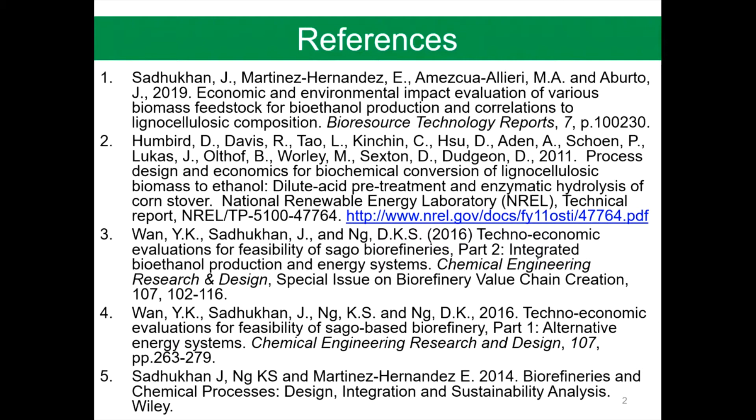And the final is a book written by me and my PhD graduates, Kok Siew and Elias, Biorefineries and Chemical Processes: Design, Integration and Sustainability Analysis. This is the most complete book on biorefinery and bioeconomy systems of present times.

The block flow diagram for bioethanol production. First, raw feedstock is taken to the A100 feed handling step. Feedstock is usually a lignocellulose material, therefore pre-treatment is needed to first break hemicelluloses apart so that celluloses can be extracted and lignin can be separated, because lignin hinders the fermentation process.

Hemicelluloses and celluloses are the polymers of C5 and C6 monomer sugars, and these need hydrolysis and fermentation to generate bioethanol from glucose. In the pretreatment stage, ammonia, steam, and acid are used. And as said, pretreatment is to extract the celluloses and hemicelluloses from lignin.

The hydrolysate, which is the soluble part, is taken to the enzymatic hydrolysis and fermentation process unit A300. An enzyme which acts as a catalyst to fermentation is produced from glucose and nutrients. Cellulase is the enzyme that is manufactured by a culture, and cellulase acts as catalyst for the enzymatic hydrolysis and fermentation process. Obviously, to maintain the bacterial culture, we need nutrients to the enzymatic hydrolysis and fermentation unit.

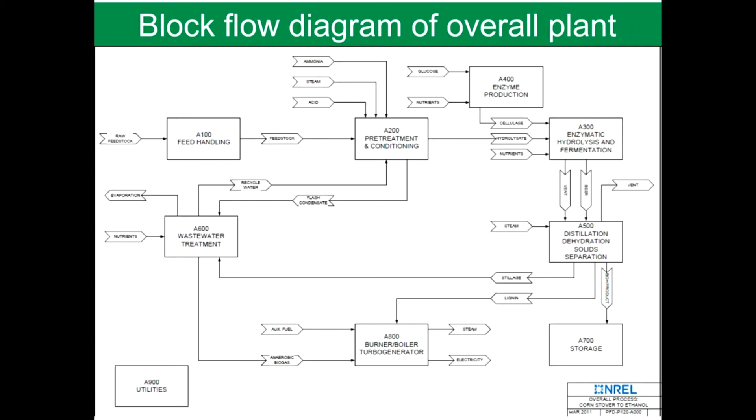The design basis in the National Renewable Energy Laboratory report is 2,000 metric dry tons biomass processed per day. And if a wet biomass contains, say, 25% moisture by mass, then the total wet biomass processing in tons per day is 2,000 times 100 divided by 75. That is equal to 2,667 tons per day of wet biomass.

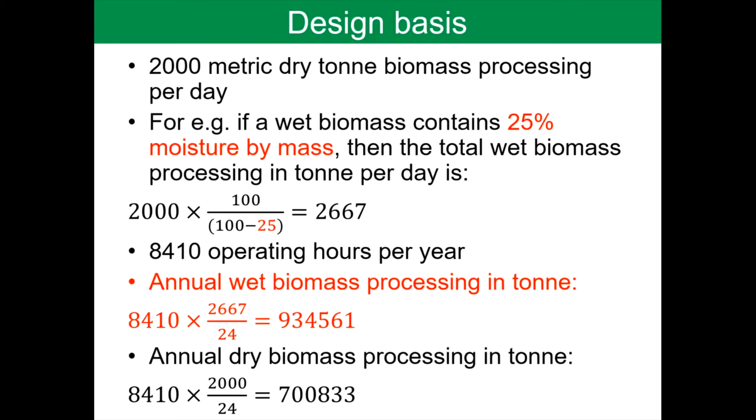Operating number of hours per year assumed are 8,410. Then from there, annual wet biomass processing or throughput in tons per annum can be calculated. And then annual dry biomass processing in tons can also be calculated. And these values are around 930,000 and 700,000 tons per annum, respectively.

Why do we need the calculations? It is to estimate, first of all, mass balance. Also looking at the energy analysis, energy balance, primarily bioethanol yield and combined heat and power yield. The process could be a net sink of combined heat and power. In that case, we really can't generate any additional heat and power. All will be used, and some additional steam may be used by the site. And in that case, there is no energy output, only bioethanol output.

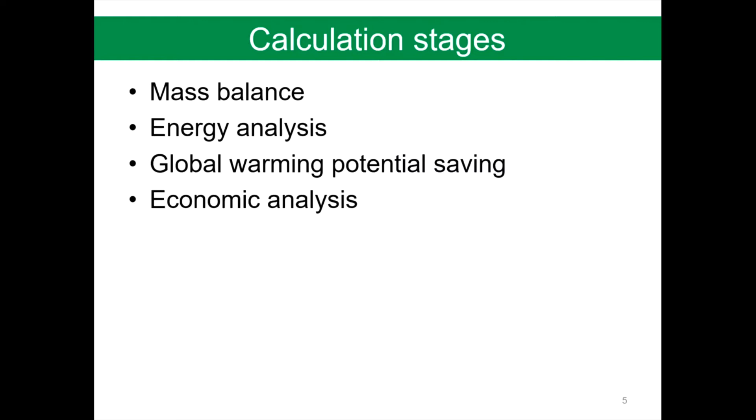But that really depends on the biomass constituents. And we are going to look into the biomass analysis, and from there try to estimate the compositions of the various products, including bioethanol as the main product. And then we're going to estimate global warming potential saving, and also carry out economic analysis of the plant to see the economic viability of the plant.

An example of biomass composition is here. The wet analysis in percentage of waste wood. Cellulose, 29.4% on a weight basis. The following chemicals, xylan, glucan, arabinan, mannan, galactan, comprise the hemicellulose fraction, and their percentage mass in the waste biomass is 20.4, 4.8, 0.5, 0.5, and 0.5 respectively on weight basis.

Lignin content is 18.7% of waste wood. Ash is 1.5% of waste wood by mass. And moisture by mass is 23.7% of waste wood.

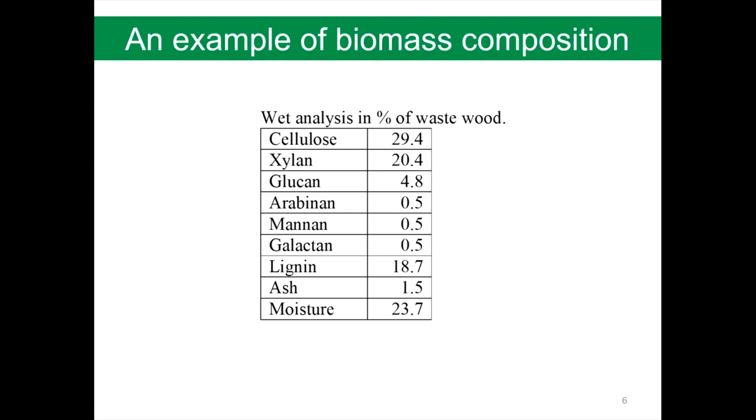Now the conversion rates, because we have to understand how much of the biomass constituents is actually converted into bioethanol. And this is to look at primarily the bioethanol product yield. In the rows, you are looking at the various types of products generated from the pre-treatment process. Basically, these will come as one hydrolysate stream, and within the hydrolysate, the various components will be present, which are xylose, furfural, oligomer, glucose, hydroxymethylfurfural, arabinose, mannose, galactose.

And these components are generated from the constituents in the hemicellulose. As we have seen in the previous lecture, the pre-treatment process actually attacks the hemicelluloses to generate the various water-soluble streams, so that the cellulose part and the lignin part are separated. And as you know, lignin hinders the microbial degradation.

Therefore, lignin has to be separated from the enzymatic hydrolysis and fermentation process in order for microbes to break down further these nutrients, these substrates into the products, and the target product here is the bioethanol.

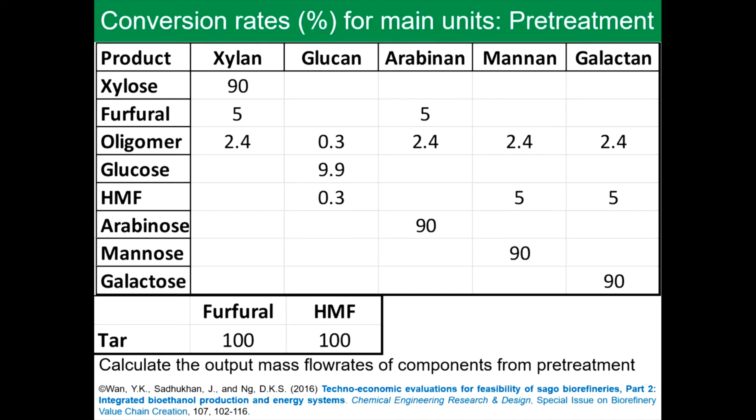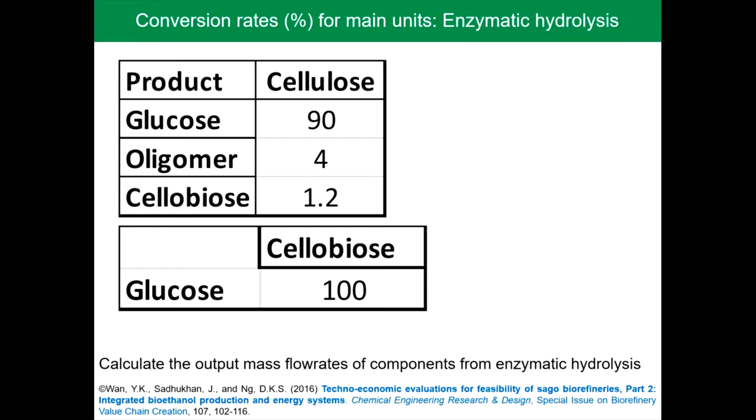Then the enzymatic hydrolysis step, where cellulose is converted into glucose, oligomer, and cellobiose by 90%, 4%, and 1.2% respectively. And cellobiose produced, that is 1.2% of cellulose, is fully converted into glucose, 100%. All these conversion rates are given on mass basis.

Then the fermentation is the core process, and the product is primarily ethanol. Ethanol is produced from glucose, xylose, arabinose in the feedstock. 95% of glucose, 85% of xylose, and 85% of arabinose are converted into ethanol. The product stream also contains Zymomonas, glycerol, succinic acid, and xylitol. Therefore, this outlet stream is taken to the separation unit.

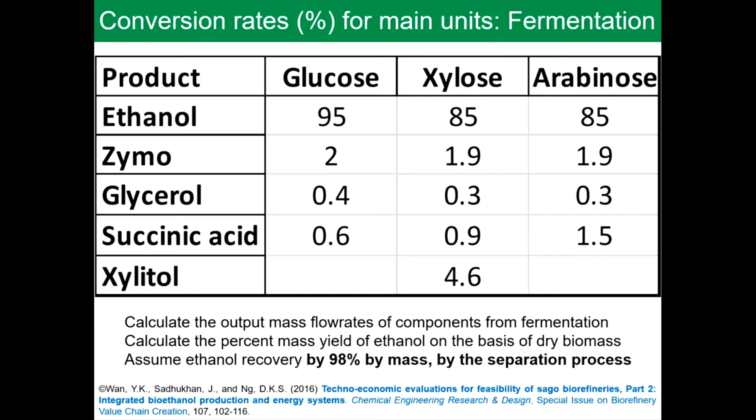The separation will comprise distillation and molecular sieve. The steps are also to break any azeotrope, and ethanol and water form an azeotrope in the column. Assume ethanol recovery of 98% by mass in the separation process.

The design basis: the balance of the organic components goes to the wastewater treatment along with the water stream. Calculate this balance from the amount of organic compounds, that is equal to total wet biomass subtracted by moisture, ash, bioethanol, lignin, and tar. Bioethanol is obviously the main product, which is 100% after the separation unit. And any stillage stream will be routed to the wastewater treatment.

Ash is insoluble, therefore it will be extracted from the pre-treatment step. The moisture also goes out to the wastewater, and moisture can be returned to the pre-treatment process. Lignin and tar are insoluble, and therefore these are routed to the combined heat and power generation process. So using this simple equation, you can calculate the amount of organic that goes to wastewater treatment.

And wastewater treatment comprises conventional processes. After that, anaerobic digestion, where organic matter, these organic components, will be converted into biogas. We assume 30% by mass of this balance ends up as biogas, which has a calorific value of 23 megajoule per kilogram. And using this, we can calculate the mass flow rate and the total energy content of biogas.

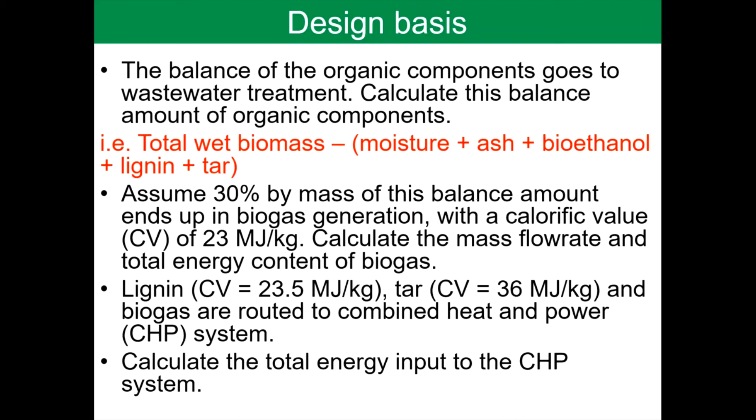Now, we have already seen the CHP system configuration in the previous lecture, which will comprise a biomass boiler and a steam turbine. We can assume a boiler efficiency of 90%, that is combusting lignin, tar, and biogas for the generation of steam. And from this, we can calculate the total energy content of the steam generated.

Steam requirement by the site is 13.6 and 15 gigajoule per ton of bioethanol produced from agricultural and forestry biomass respectively. Applying these two numbers, we can calculate the amount of steam required by the site. And then this steam requirement can be fulfilled either partially or fully by the combined heat and power system.

If the combined heat and power system can fulfill this amount of steam required by the site and still generate some excess steam, then the excess steam can be expanded in a steam turbine producing electricity at 35% energy efficiency. Hence, we can calculate the amount of electricity generation.

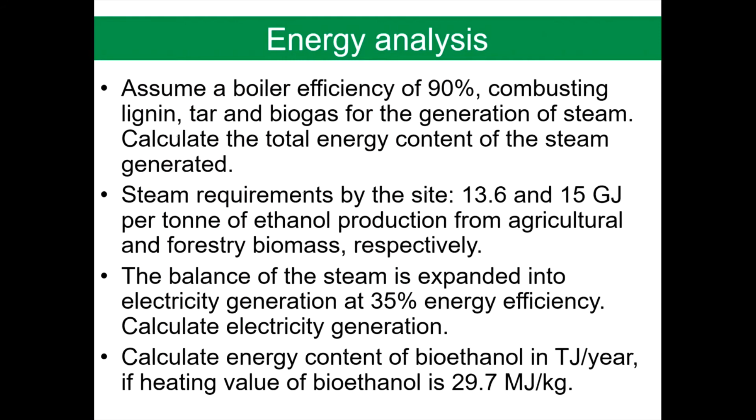In the current policy landscape, the final use of biomass for energy and transportation fuel is considered to be carbon neutral. And this is true because direct biogenic emissions from biomass end use are captured during growth, completing the carbon cycle. In this case, we are generating bioethanol, which has the primary application as transport fuel, and when the fuel is burned, carbon dioxide is released to the atmosphere, but that carbon dioxide will be captured during the growth of the biomass. And thus, it is a full carbon cycle, which is much faster than the non-renewable fossil resources based cycle.

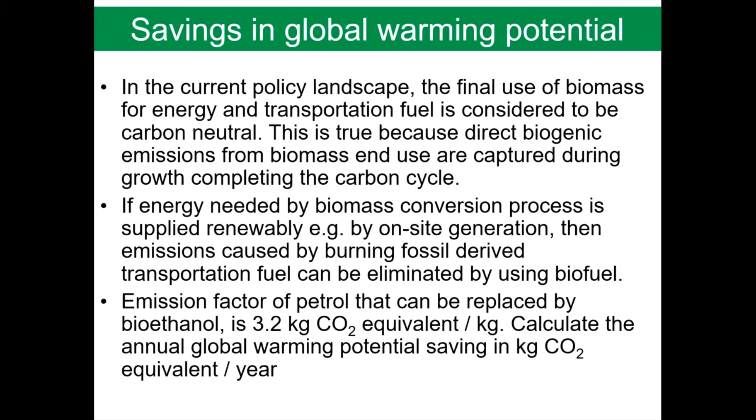If energy needed by the biomass conversion process is supplied renewably by on-site generation, then emissions caused by burning fossil-derived transport fuel can be eliminated by using biofuel. The emission factor of petrol that can be replaced by bioethanol is 3.2 kilogram carbon dioxide equivalent per kilogram. And based on that, we can calculate the annual global warming potential saving in kilogram carbon dioxide equivalent per year. So the performance calculation in terms of bioethanol yield can be applied to this factor of 3.2 kilogram carbon dioxide equivalent per kilogram to calculate the global warming saving in carbon dioxide equivalent per year.

Important economic terms for economic comparisons between systems. The economic margin is calculated by the difference between value of products and operating cost and capital cost. Netback, when feedstock cost is unknown, is the difference between value of products and operating cost without cost of feedstock plus capital cost. Cost of production: when product price is unknown, then operating cost, including the cost of feedstock, and capital cost are added to calculate the cost of production. The cost components are capital cost and operating cost.

Capital cost is primarily calculated from the delivered cost of equipment or the direct cost of equipment. Then indirect costs are calculated, working capital can be calculated, and from which total capital investment is calculated. An annual capital charge is applied to the total capital investment to calculate the annual capital cost. Operating cost is always calculated annually, and that consists of fixed and variable operating costs.

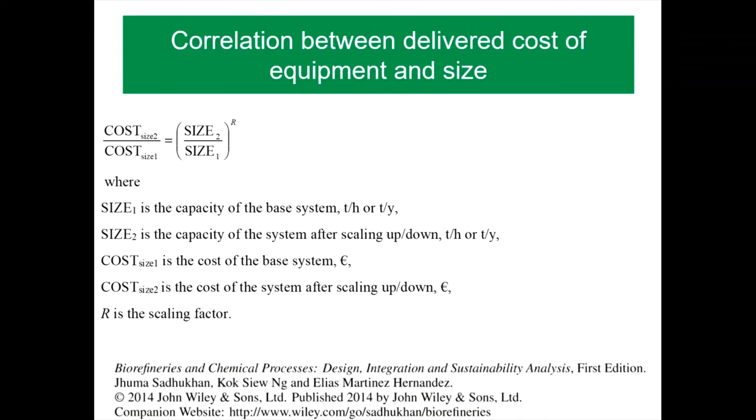Correlations between delivered cost of equipment and size. This is to show the economy of scale. R value is less than 1, suggesting that with increasing size, we get more economic benefit. So the cost for a different size can be calculated for a base size and cost given. Size 1 is the capacity of the base system, and size 2 is the capacity of the new system. Cost of size 1 is the cost of the base system, and cost of size 2 is the cost of the system under consideration. R is the scaling factor less than 1, showing the economy of scale. So from known cost and size data obtained from the vendor, for a given size, we can calculate the cost of a piece of equipment. And this is how the main equipment of the site can be calculated, and that comprises the delivered cost of equipment.

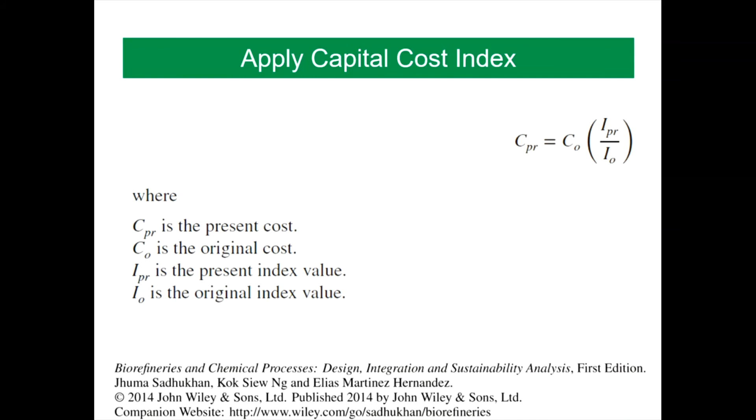But this cost can be outdated. Thus, we need to convert it to the present cost by applying a present index value using this correlation, and we apply the chemical engineering plant cost index in the most recent year to update the cost information that we obtained.

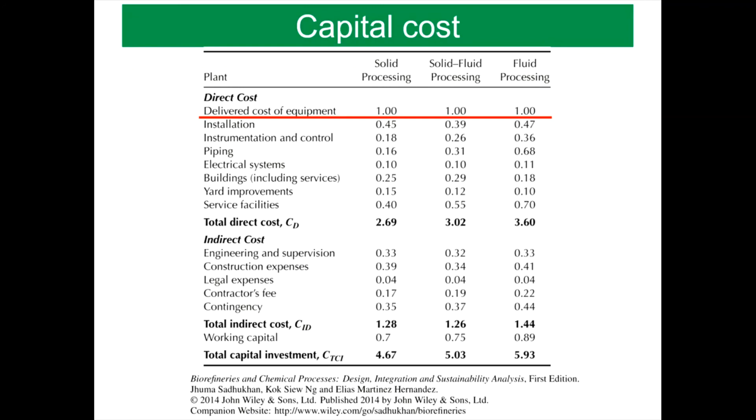The total capital investment is thus 4.67 times the delivered cost of equipment for solid processing, 5.03 times the delivered cost of equipment for the solid fluid processing system, and 5.93 times the delivered cost of equipment for the fluid processing system. Annual capital cost is then calculated by applying the annual capital charge, which is assumed at 0.13, to the total capital investment.

The operating cost has two main components: fixed operating cost, that's dependent on indirect capital cost, and fixed operating cost dependent on personnel cost, and the variable operating cost. Total fixed operating cost and variable operating cost are added and then factored by 1.3 to get the total operating cost.

Under the fixed operating cost that's dependent on indirect capital cost, the items are maintenance, capital charges, insurance, local taxes and royalties, 5 to 10%, 10%, 1%, 2% and 1% of indirect capital cost annualized respectively, and fixed operating cost items that depend on personnel cost are personnel, laboratory costs, and supervision and plant overheads. Again, it is factored with respect to personnel cost.

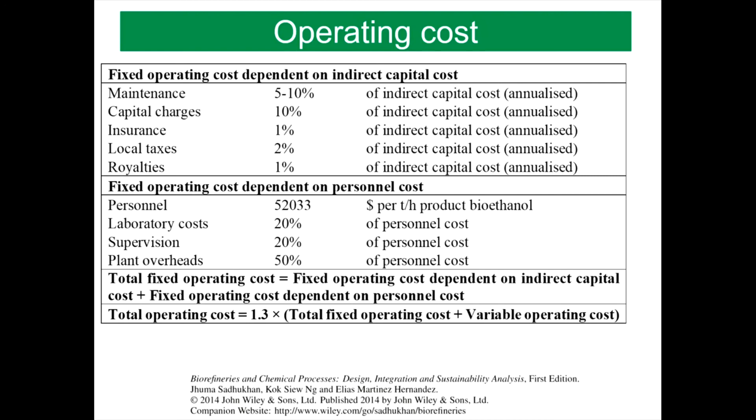Using these correlations, you then calculate the total fixed operating cost. You also have to calculate the variable operating cost. These two costs are added and multiplied by 1.3. That will give you the total operating cost of the system. As you know from previous graphs, the indirect capital cost depends on the delivered cost of equipment, and for the solid fluid system, this factor is 1.26 times the annualized delivered cost of equipment.

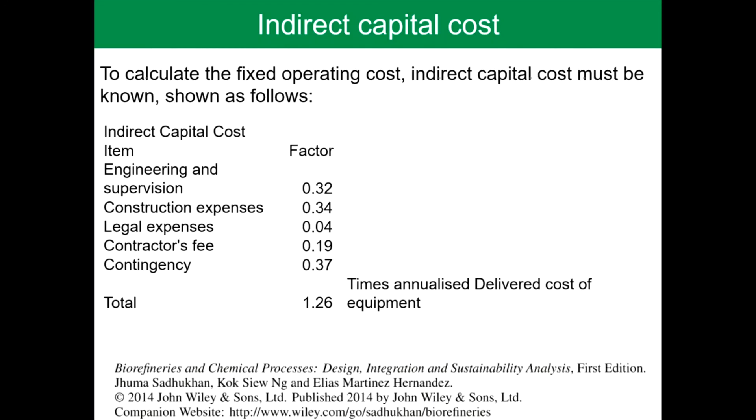You can ignore the cost of biomass in the case of calculation of netback, which you will do by taking account of the product value and all other costs on an annual basis to give you an estimate of the margin that you can obtain per unit of biomass.